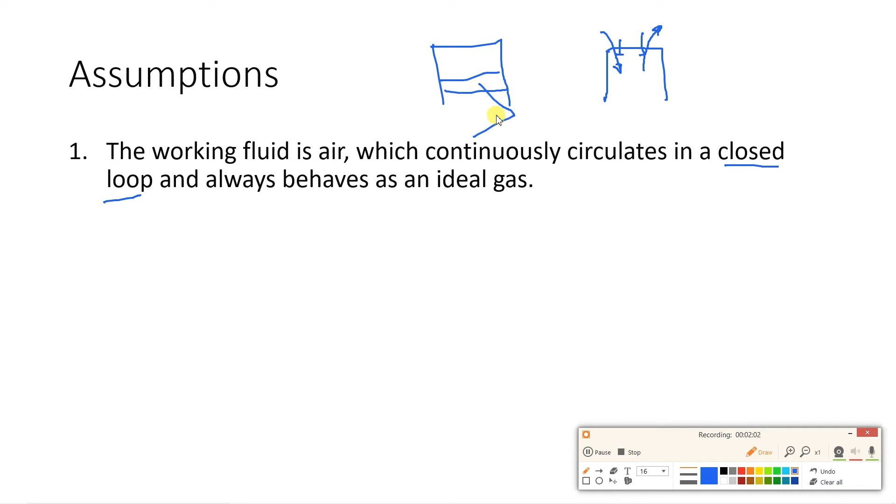So the first assumption is that the working fluid is air. The second assumption, within this, is that air circulates in a closed loop, meaning air is not entering and air is not leaving—there will be no valves, and the cylinder will be like this, with a piston. We will see the arrangement later. This is how the system will work, with the same air undergoing different processes.

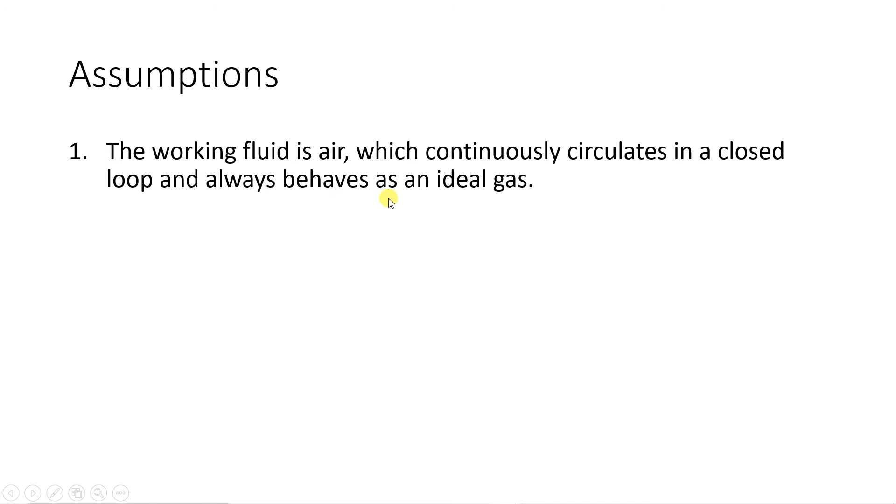We are also making one assumption here, that air behaves as an ideal gas.

Now, all the processes that make up the cycles—we will see the different cycles later—are assumed to be reversible. Again, in the actual case this is not true; all processes will be irreversible because of friction, and because of friction, the actual cycle is irreversible. Here we are assuming all processes in the cycle are reversible, which is why the cycles we are going to study are ideal cycles.

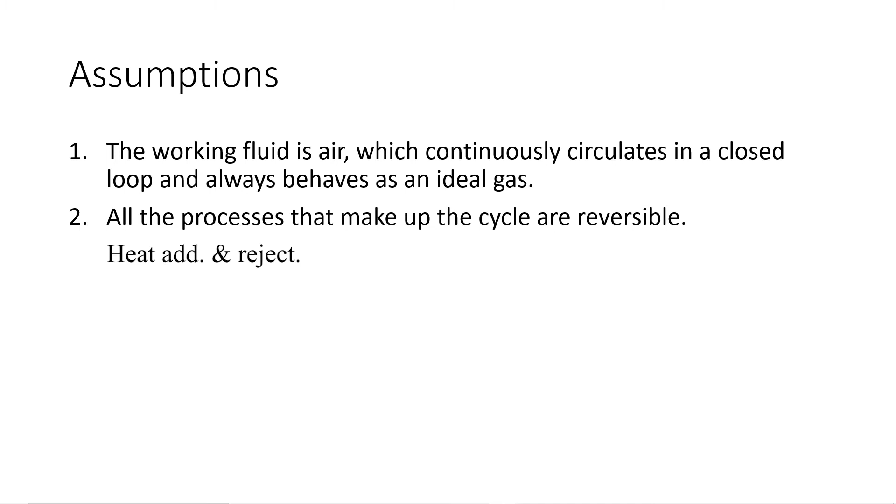Third, heat rejection and heat supply take place with the help of an external reservoir. This point is important to understand, and we will see it later. So this is heat addition and heat rejection—it takes place with the help of an external heat reservoir due to heat transfer.

Next, the specific heat of air does not vary with temperature. Again, this is an assumption. Practically, if you check any thermodynamics data book, you will see that the specific heat of air, Cp, does vary with temperature. But here, the assumption is that the specific heat of air does not vary with temperature.

The working fluid is homogeneous throughout and no chemical reaction takes place.

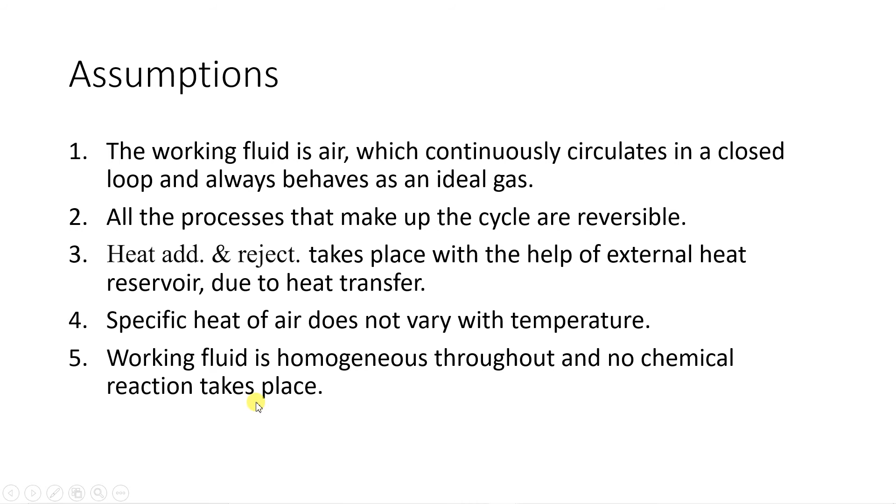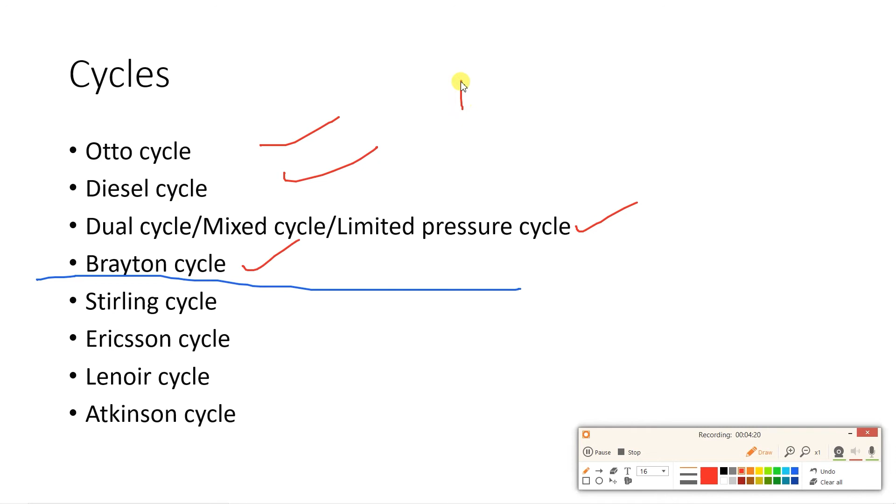Now there are different cycles involved here. We will see the first four cycles: Otto cycle, diesel cycle, dual cycle, and Brayton cycle, looking at the derivations and numericals. Whereas for the remaining four cycles, we will only look at the theory and working of the Stirling cycle, Ericsson cycle, Lenoir cycle, and Atkinson cycle.

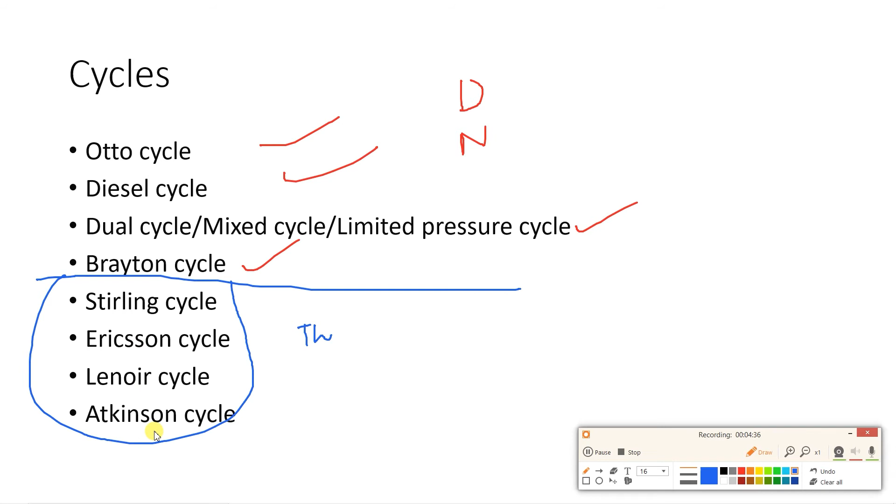So we'll move on to the first cycle, known as the Otto cycle. Now, the Otto cycle is an ideal cycle for the spark ignition engine. What do you mean by spark ignition engine? You will find a spark plug in a petrol engine. So this Otto cycle is an ideal cycle for the spark ignition engine, meaning the petrol engine. Now why is this an ideal cycle?

Because we have made some assumptions, like air is ideal, air is the only working fluid, and this is a closed system where air is not entering and leaving the control volume—so the system is a closed system. Because of these assumptions, the cycle we are going to study is an ideal cycle. This cycle was developed in 1876 by Nikolaus Otto, who was a German engineer.

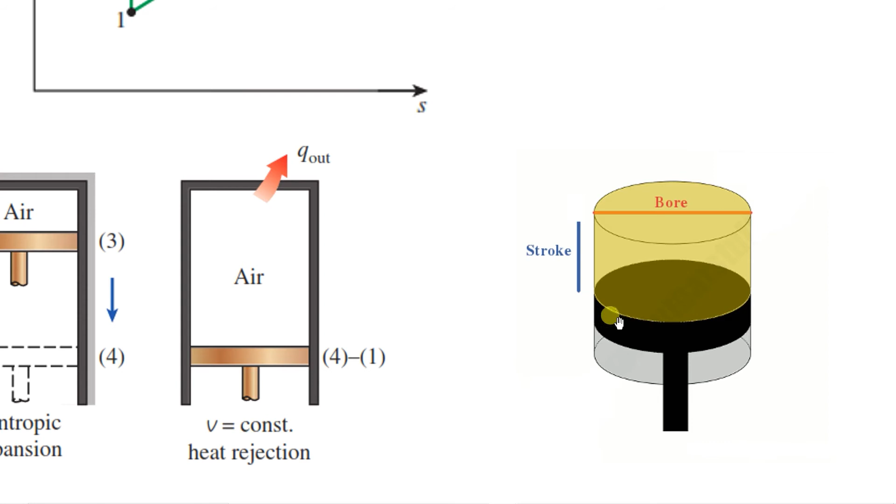To understand this cycle, we will first understand basic terminologies. Suppose this outer part is a cylinder, which is hollow and empty. The working fluid will be air only. This part is the piston. The piston is also cylindrical, but its length is small compared to the cylinder. So here a cylinder is shown, and inside the cylinder the piston is there, and this piston will reciprocate inside the cylinder.

Valves have not been shown over here. So basically this is a closed system. Same air is getting compressed, same air is getting expanded.

One assumption is that heat is added with the help of some external reservoir. Outside, Q in is entering the cylinder. There will be a reservoir attached, which is at higher temperature compared to the system, so heat is supplied to the closed system. Similarly, heat is rejected through another reservoir whose temperature is less than the air inside the cylinder. That is why heat is rejected, because of the gradient.

You have to understand that air is not entering and exiting the closed system, that is why this is a closed system. The heat transfer which occurs in the system is with the help of an external reservoir. In the actual case, there will be a valve and air is entering, there will be combustion, there will be a spark, and heat is generated inside. But since this is an ideal cycle, we study this system as a closed system, and to supply heat we use some reservoir.

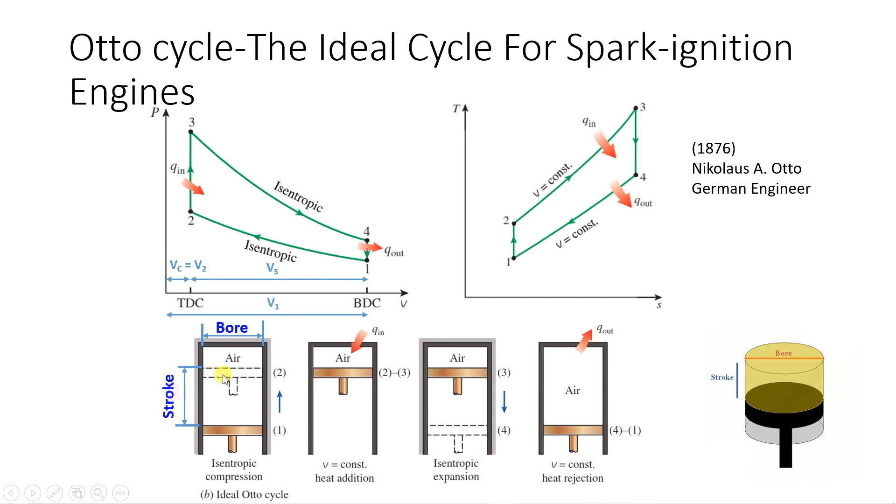Now to understand this diagram, I'll draw one more diagram. Here I have kept the cylinder in horizontal position. This is because when the piston is at the rightmost position, that is point number 1. Then the piston moves from right to left. This process is known as isentropic compression. Now it is important to compare these two diagrams.

These are the 4 cases. First, on the diagram, isentropic compression is there, process 1 to 2. Then constant volume: on the PV diagram, from 2 to 3 volume remains constant on the x-axis, so this is the constant volume heat addition process. The third process, 3 to 4, is isentropic expansion, and the fourth process is constant volume heat rejection. So this is how we get the ideal Otto cycle.

Now here the position of the cylinder is vertical. The initial position of the piston is over here and the final position is over here. This piston is not touching the uppermost part of the cylinder because air is inside. When you are compressing the air, there will be back pressure from the air, so some clearance has to be maintained. You can see this clearance given here, at the end of the cylinder where air has been compressed.

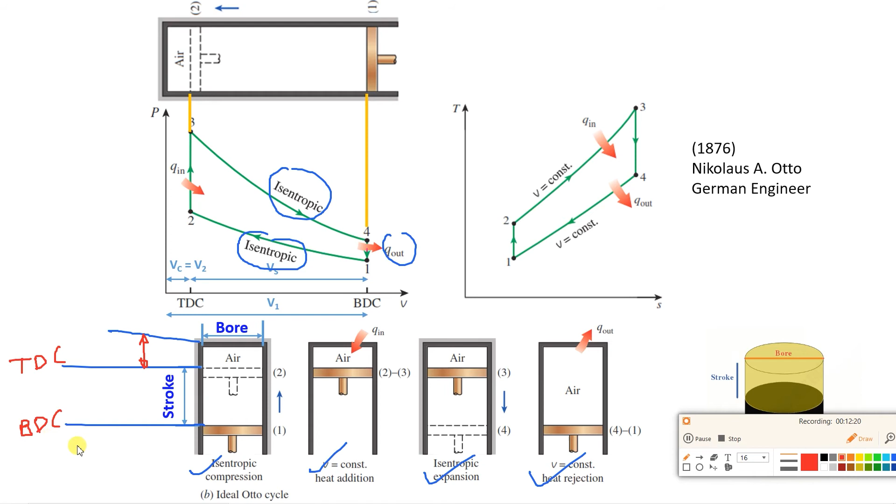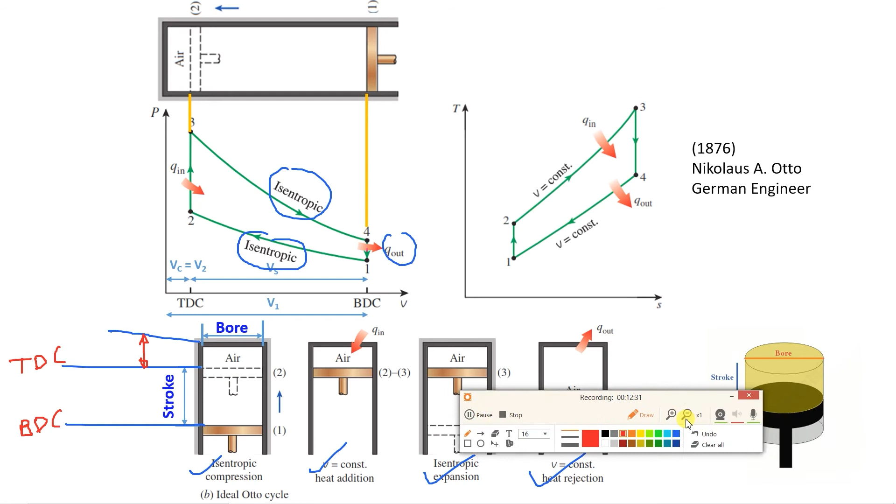So these are a few new terminologies. Bore is there - bore is the internal diameter of cylinder. Then stroke is there, which is the length the piston travels, known as stroke length. And the topmost position, where the piston stops, there will be some clearance volume. This volume will be clearance volume, and this is known as top dead center, and this one is known as bottom dead center. It will depend on the orientation also, whether the piston is over here or the cylinder is inverted. So these are the few notations.

Now what I have done over here is we'll simultaneously see both the diagrams - the top diagram and the bottom diagram. So suppose initially piston is at point number 1. Here also you can see point number 1 piston is there.

Now we apply external work. Inside the control, inside the system, what is present? Air is there - that is our assumption. And this is a closed system, so you can see there is no opening in the cylinder, so air cannot escape. So piston will compress the air, piston will reach over here, and this is point 2. So 1 to 2 is shown over here, this is isentropic compression.

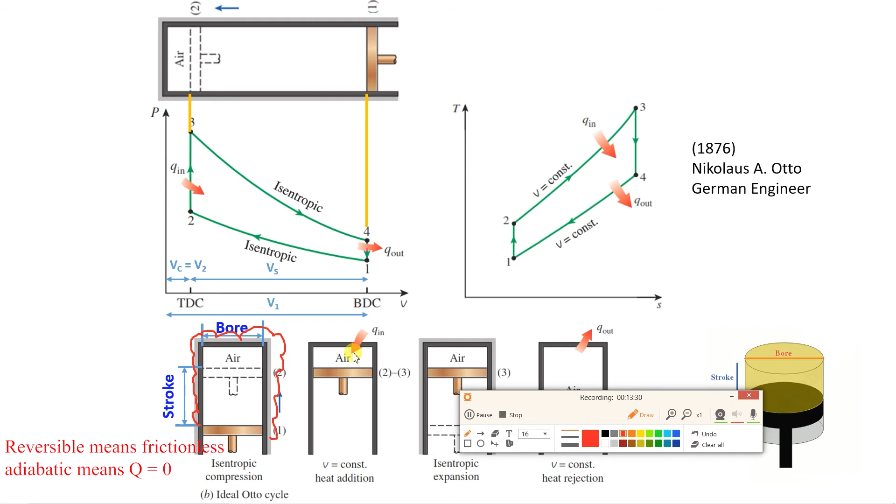Now why is this isentropic compression? You can assume that insulation has been provided during compression, so during compression heat is not rejected. So it is reversible and adiabatic - that is why isentropic.

Now once the piston has reached at this position, top position, what will happen? At constant volume, piston will remain here - you can see volume is constant. External reservoir is attached, which is at higher temperature, and it will supply heat at constant volume. So here you can see process 2 to 3, it is heat addition at constant volume.

Now it is important to note that whatever points we are marking, like isentropic compression, here volume is reducing. This part we have already seen in module number 1, so this module is closely linked with module number 1. All the closed system formulas we studied in the first module, for all the processes - isentropic, constant volume, constant pressure, isothermal, polytropic - all the formulas will be required over here. So we will be using those formulas over here as well.

And I had already explained how to draw PV and TS diagram. So constant volume heat addition process, why it is vertical, I have already explained. So you can check that. If you have any doubts, you can check that video.

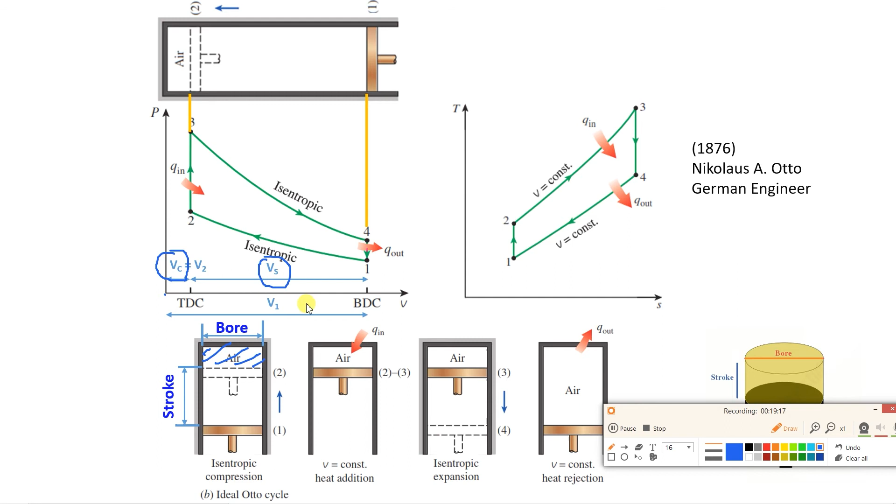This volume, I am showing in a 2D diagram, but it will be a volume since it is a cylinder. So this is known as clearance volume, and wherever the piston is moving in the stroke, that volume is known as swept volume, VS, denoted by VS. So these are few terminologies which you should remember.

Now from here we can derive a simple formula for VS, swept volume. What will be VS? From point 1 to point 2, what is the volume of the cylinder? It will be pi by 4 d square into L. What is this d? It will be bore. And what is this L? It will be this stroke.

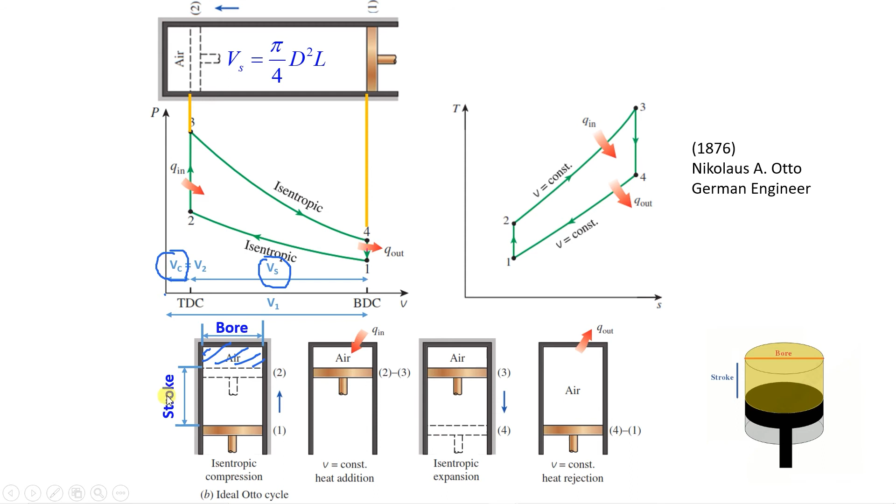So what is the formula? This swept volume will be from this point to this point. So this volume is swept volume, which is given by VS is equal to pi by 4 d square, d is bore, into L, L is stroke. So this is known as Vs, swept volume.

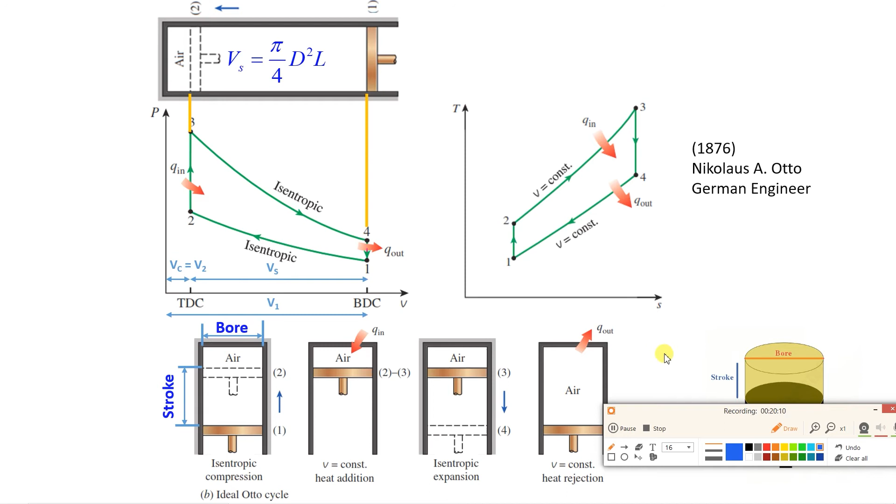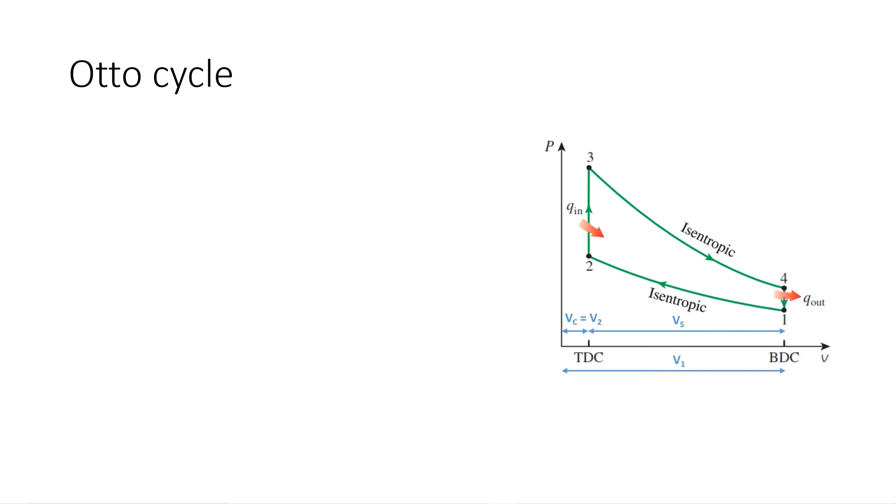Now again we will define few terminologies in case of Otto cycles. Before going for the derivation of the efficiency of Otto cycle, it is important to understand some terminologies. So first terminology is compression ratio. We are denoting compression ratio by RC.

Again here it is important to note that if you refer different textbooks, you will find different notations. So we are using compression ratio as RC. It is not necessary that all textbooks are referring compression ratio as RC. Meaning will remain same, notations might vary. So what do you mean by compression ratio? It is the ratio of volume before compression to the volume after compression. Now what is the volume before compression?

Here you can see the diagram. What is the volume before compression? It will be this one, right? This is volume before compression. And what is the volume after compression? After isentropic compression, piston will reach at point number 2. So this will be volume after compression. So we have to understand this. What will be the formula of compression ratio? It will be point number 1 volume V1 divided by point number 2 volume V2.

Now next definition. Again here you can see that V1 is made up of Vc plus Vs. So you can replace this over here. So Vc is clearance volume, or V2 also you can say. So this V1 will be equal to Vc plus Vs, swept volume. So this is the total volume, Vc plus Vs, divided by what is V2? Only Vc. So this formula also you can use. So this V2 is Vc. Now next formula, next definition we will see.

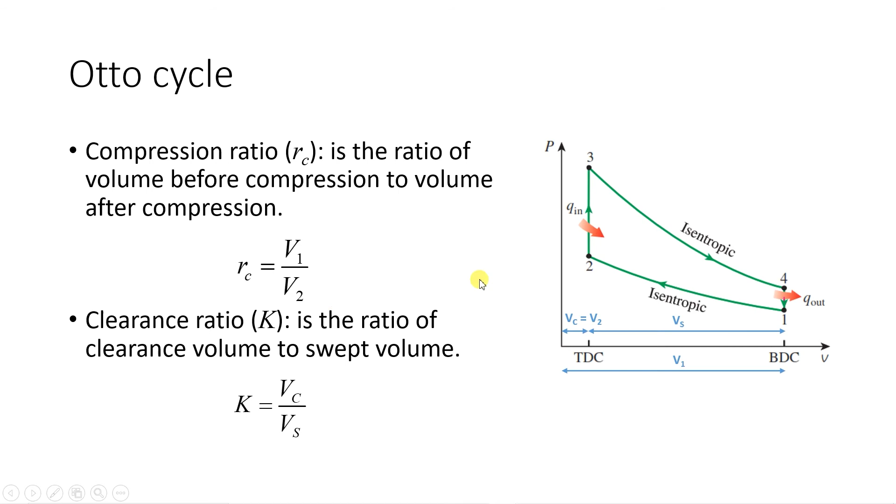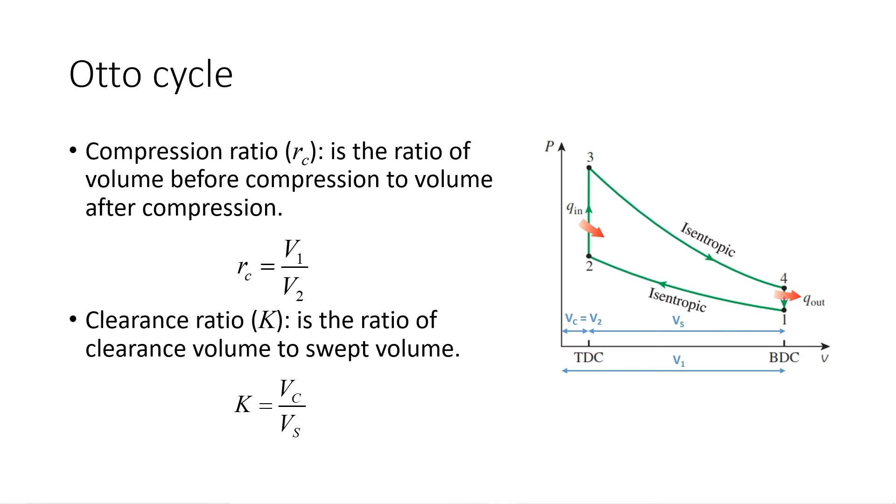In Diesel cycle you will understand, even though there also we are defining compression ratio, the definition remains same, but points are changing, that is why the formula might change. In few cases the formula might change, in few cases it might not change. We'll see when we go to the other cycles.

So this is how we get the relation between K and Rc. Now next definition is expansion ratio. What do you mean by expansion ratio? It is the ratio of volume after expansion.

So here you can see 3 to 4 is isentropic expansion. So what is volume after expansion? V4, to the volume before expansion, which is V3. So you can write Re is equal to V4 by V3.

Now in case of Otto cycle only, it is visible in the diagram that V4 is equal to V1 and V3 is equal to V2. So we can write one more formula. V4 is equal to V1 because this is constant volume heat rejection, and V3 is equal to V2 because this is constant volume heat addition.

So again here for Otto cycle, it is important to note that expansion ratio is equal to compression ratio. Now V1 upon V2 we have already defined, it is compression ratio. So this is a special case. Only in Otto cycle you will find that expansion ratio is equal to compression ratio, because here we have constant volume process.

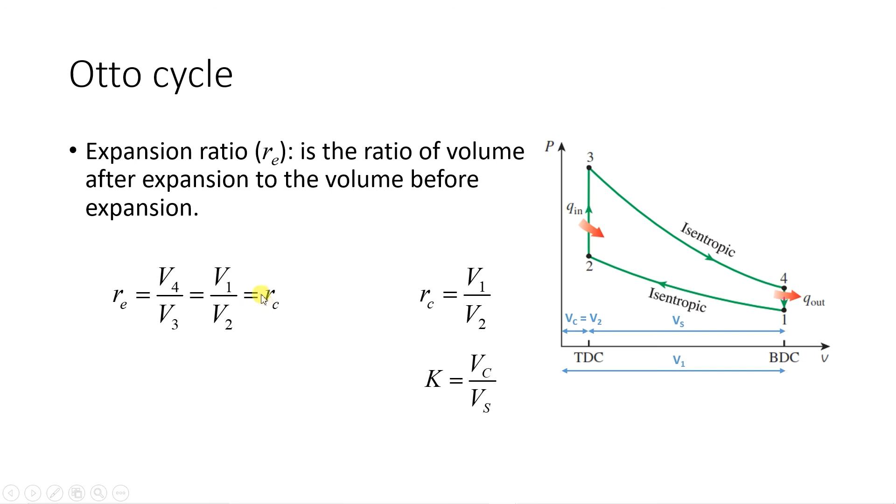So these formulas we have studied: Re is equal to V4 by V3, Rc is equal to V1 by V2, and Re is equal to Rc for Otto cycle, and K is equal to Vc by Vs.

Now we will look at the efficiency derivation of Otto cycle thermal efficiency. Very important derivation. So again I have shown over here the PV and TS diagram. Basically using this diagram we can derive efficiency of Otto cycle.

Now what do you mean by efficiency? We have seen this in second law of thermodynamics. It is W net upon heat supplied. Now since this is a cycle, here you can see 1, 2, 3, 4 and 1. Since initial point and final point is same, we can say that this is a cycle, and it is Otto cycle.

So for a cycle, what is first law of thermodynamics? W net is equal to Q net. So efficiency is W net upon heat supplied, output upon input, and we can replace W net by Q net based on first law of thermodynamics.

Now what is this Q net? You have to add whatever heat is supplied, minus whatever heat is rejected. So here you can see heat is supplied during 2 to 3, QS, and heat is rejected in 4 to 1 process, minus QR, divided by QS. Simplifying this, you will get 1 minus QR by QS.

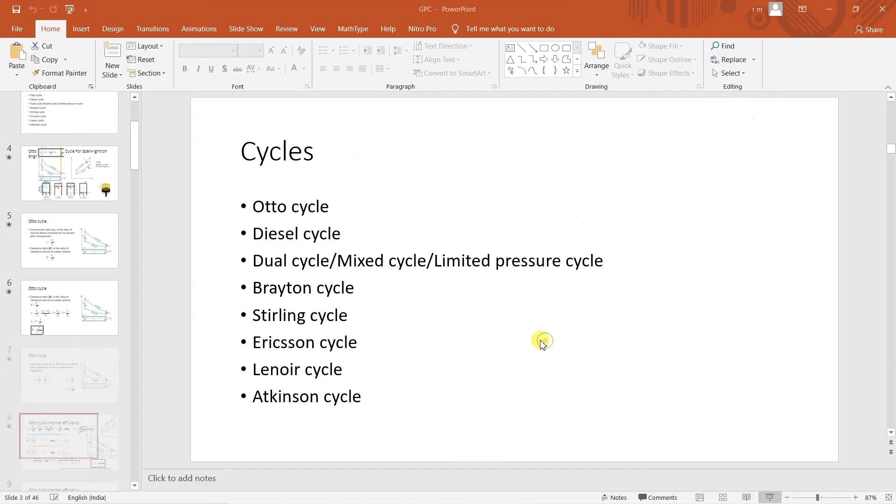So which formulas now you have to use for heat rejection and heat addition, module number 1? So here we will go to the formula list. For closed system, constant volume process, what is the heat formula? It is mCV times T2 minus T1. So we will be using this formula for QS and QR. So we'll again go back to the derivation.

So here what I have done, I am substituting the formula. It is mCv delta T. So instead of QR, here you have to take note that when we are deriving this efficiency, at the initial stage itself I am declaring that the Q value is negative. So already the sign convention has been taken into account. So don't go into the details of the formula, like if you see the formula list.

Okay, let me hide this. What is the actual formula here? Actual formula is Q1 to 2, direction is from 1 to 2. Formula is mCv T2 minus T1. So it has a certain particular direction. So if you see this one, when 1 to 2 is there, the formula will match.

But when you are going for 4 to 1, using that formula, you will get a negative answer. Why? Because it is heat rejected. But it is important to note that we are already taking care of sign convention. How are we taking care of sign convention? At this stage itself, I am declaring that heat is negative.

Here you can see I am taking this Q value as negative. So that is why when I am writing the formula for heat rejection, I am not looking at sign convention.

So here you can see that I am not considering sign convention. I am simply writing the magnitude. Why? Because the direction, the sign, I have already taken into account. So magnitude means I will write this as you can see over here. I have written higher temperature minus lower temperature.

Okay, so what is now the formula for constant volume heat interaction? It is mCv dt, delta T. So in both numerator and denominator, I have written mCv dt.

Now since I am already considering the sign convention of heat rejected, the formula of heat rejection which I am writing, it is rejected. Here you can see, I will highlight this in the diagram also. From 4 to 1, here heat is rejected, and we have already considered this sign over here. So that is why we are only looking at higher temperature which is T4 minus lower temperature which is T1.

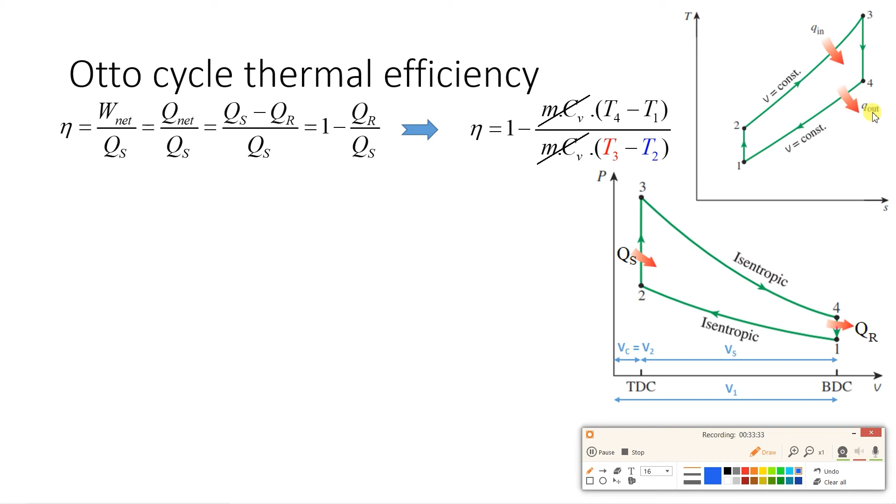So in this way, at the initial stage itself, I am taking care of sign convention, so that when I am writing the formula, I can directly see the TS diagram, and whatever is the higher temperature and lower temperature, I can write down that value.

Now, process 1 to 2. So we will go process by process now. So 1 to 2 is which process? It is isentropic compression. So for isentropic compression process 1 to 2, what we can write?

There is a relation between temperature and volume. What is that relation? You can again go back to the formula list. What is the relation? See this one. For isentropic process, let me highlight the isentropic process. This is the isentropic process.

So for isentropic process, what is the relation? Okay, here you can see the relation between temperature and volume. So respective relations can be used. We will be using all these 4 relations throughout, wherever isentropic process is there. So again we'll go back to the derivation.

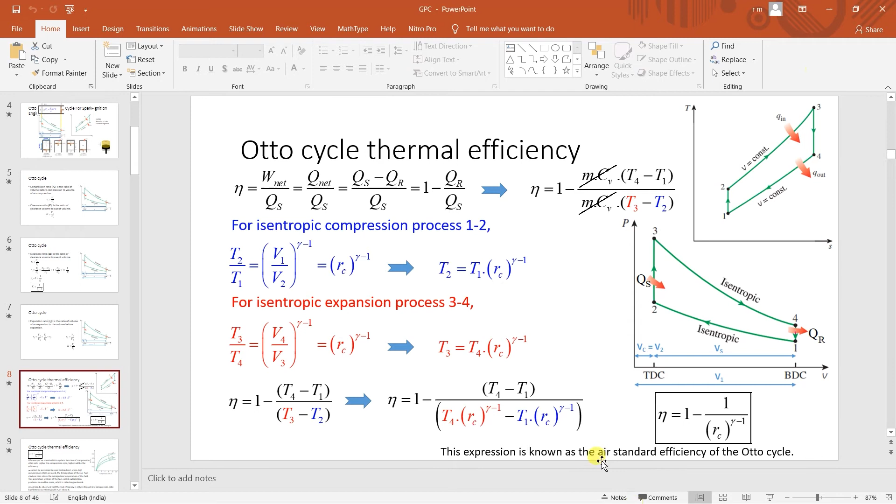So from there I have written T2 by T1 equal to V1 by V2 raised to gamma minus 1. We have derived this. What is V1 upon V2? It is the compression ratio RC. So I have to substitute that value, RC raised to gamma minus 1. So T2 will be equal to T1 times RC raised to gamma minus 1, where RC is V1 by V2, the compression ratio we have already discussed.

Now we will see process 3 to 4, which is isentropic expansion. So again we can write down the formula, T3 by T4. Here you should note, don't make the mistake: when T3 by T4 is there, volume is in reverse way, V4 by V3 raised to gamma minus 1. This formula we have already derived also in module number 1.

Now what is this V4 by V3? It is known as the expansion ratio RE. But for the Otto cycle, we have seen that RE is equal to RC. So I am replacing V4 by V3 with RC, giving RC raised to gamma minus 1. So what I will get is T3 equal to, taking T4 to the right hand side, T4 multiplied by RC raised to gamma minus 1.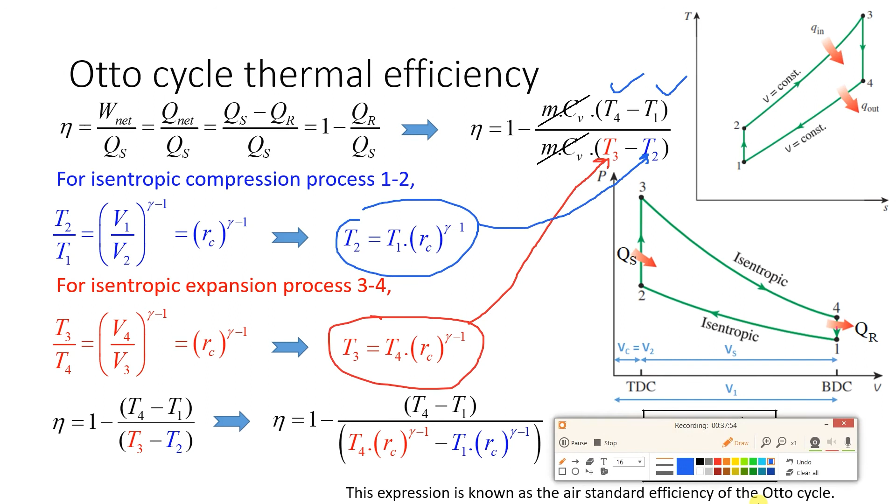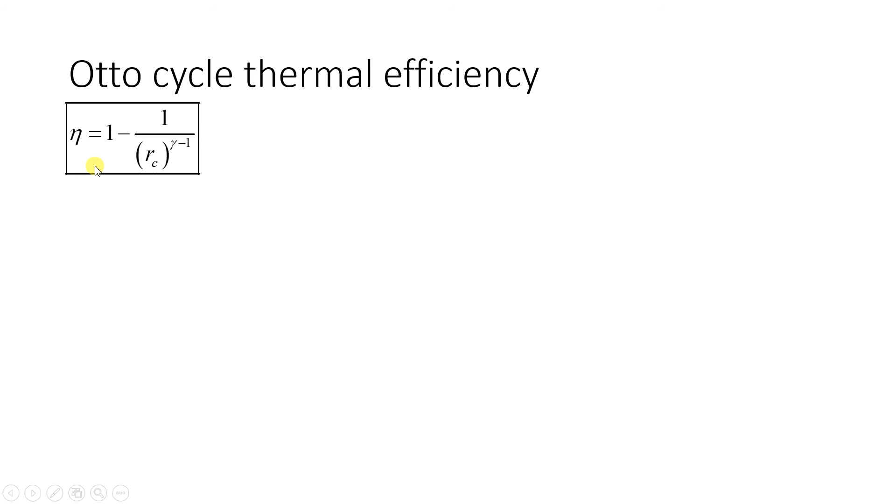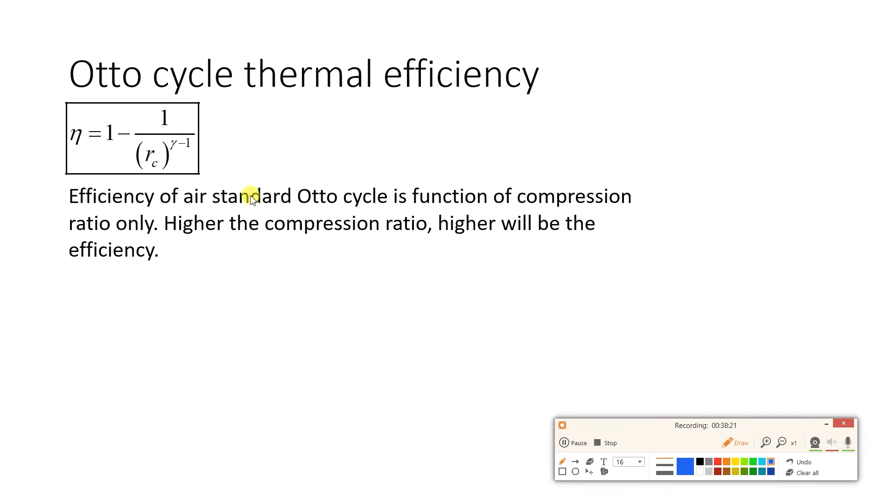Now after deriving this, we will see on which parameters efficiency depends. The efficiency of air standard Otto cycle is a function of compression ratio only, RC. Higher the value of compression ratio, higher will be the efficiency. Here you should understand: if this RC value is increased, we are increasing the denominator. So if the denominator is increased, this ratio, the total ratio, will decrease, and 1 minus a small value will give higher efficiency. That is why higher compression ratio gives higher efficiency.

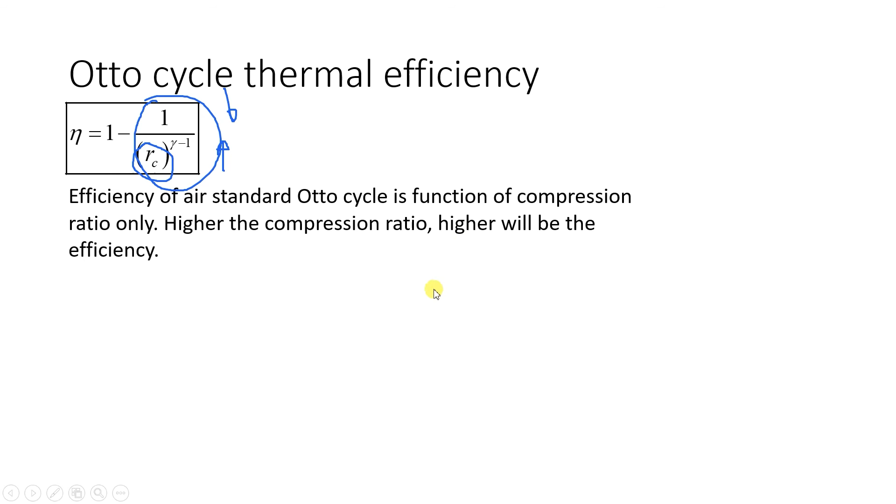This is an interesting phenomena. When compression ratio is increased beyond a certain limit, the temperature of the air-fuel mixture rises above the auto ignition temperature of the fuel, meaning the fuel will auto ignite at that temperature. Because of that, there will be premature ignition of fuel, also known as auto ignition, and that is undesirable. This produces an audible noise inside the engine, and that phenomena, that noise, is called engine knock. So because of that, we cannot go beyond a certain limit of compression ratio.

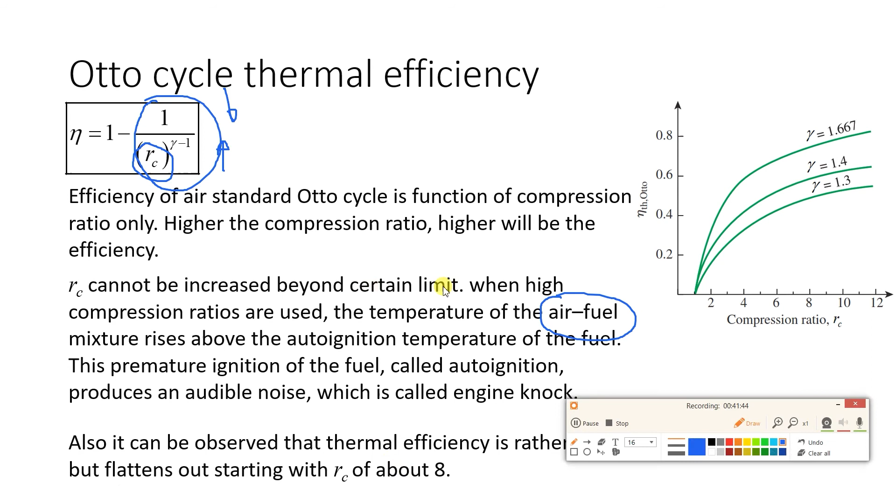Now we'll see a derivation of work output from the Otto cycle. So where do you get work output? I'll show you this in the diagram. During process 1 to 2, which is isentropic compression, we supply work to the system. During process 3 to 4, isentropic expansion, we get work from the system. So this work will be negative and this work will be positive.

Now you have to go back to the formula list for isentropic process. What is the formula of work done for isentropic process? It is P1V1 minus P2V2 upon gamma minus 1. So this formula we will be using.

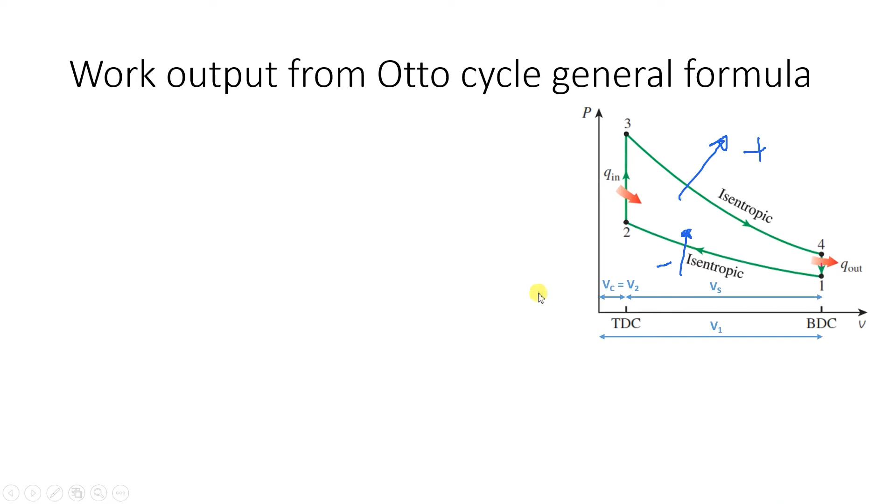So here you can see I am using that formula. For process 3 to 4, the formula is P3V3 minus P4V4 upon gamma minus 1. Now this work is consumed during compression, so it is negative: minus P2V2 minus P1V1 upon gamma minus 1.

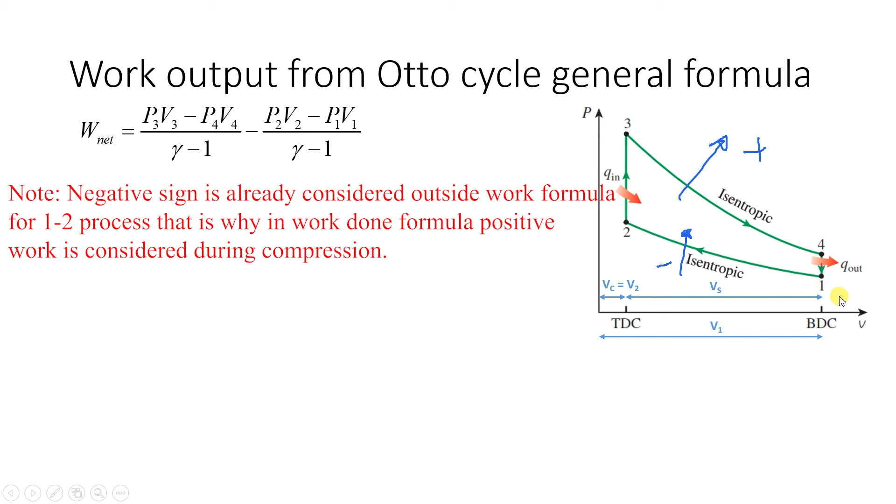Now what I can do is take 1 upon gamma minus 1 common. So I am taking 1 upon gamma minus 1 common outside, and in this part I am taking P4V4 common.

So here you will get P3V3 divided by P4V4 minus 1, minus, and in this part I am taking P1V1 outside as common. So here you will get P2V2 divided by P1V1 minus 1.

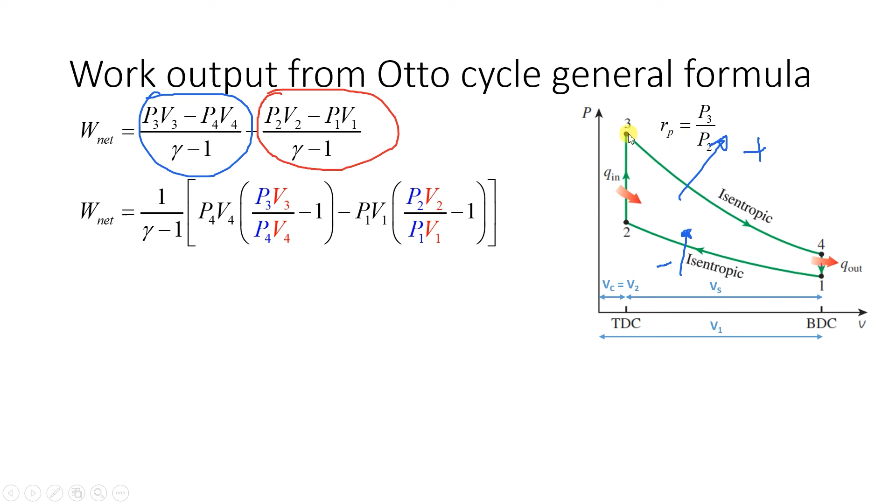Now I have highlighted P3, P4, V3, V4 with some colors, because we will be replacing these values with some other value. Now one more definition: pressure ratio, RP. The definition we will see afterwards in the diesel cycle later on, but just understand the formula here. For the Otto cycle, the pressure ratio is P3 by P2.

Now we will do some small analysis. Process 3 to 4 is an isentropic process. Refer to the closed system formula list for the relation between pressure and volume. So I'm writing that relation: P3 by P4 is equal to V4 by V3 raised to gamma.

Similarly, for process 1 to 2, isentropic compression, I can write the relation between pressure and volume: P2 by P1 equal to V1 by V2 raised to gamma. Now, V1 is equal to V4 and V2 is equal to V3, this is for the Otto cycle. So I can write P3 by P4 equals P2 by P1 equals V4 by V3 raised to gamma equals V1 by V2 raised to gamma. Now V1 by V2 is the compression ratio RC, and V4 by V3 is the expansion ratio RE. For the Otto cycle both are the same, so I am writing it as RC raised to gamma.

Now you can understand that since this is in blue color, we will be substituting P3 by P4 here. You can substitute that value, and this P2 by P1 value also you can substitute over here. Now similarly we will see the definition of compression ratio. It is V1 by V2, and it is also equal to expansion ratio, which is V4 by V3. So you can see it given by red color, and here you can find it is the inverse of this one. Here we have V4 by V3 and here we have V3 by V4. So this value we can substitute over here, and similarly this red value we can substitute over here.

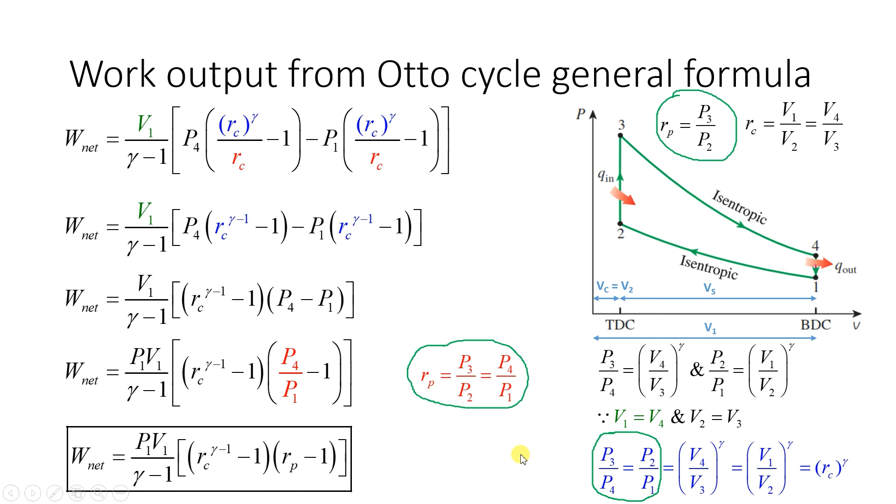Now next important definition we will see: mean effective pressure, denoted by MEP. Now in numericals also you have to calculate the value of mean effective pressure, so understand the concept of this mean effective pressure.

What is done? It is a fictitious pressure that if it acted on the piston during the entire power stroke would produce the same amount of net work as produced during the actual cycle.

Here you can see 1 to 2 is isentropic compression, then 2 to 3 is constant volume heat addition for Otto cycle, 3 to 4 is isentropic expansion, and 4 to 1 is constant volume heat rejection. So if you constitute this cycle, what is the W net? It will be power produced during 3 to 4 minus power consumed during compression from 1 to 2.

That is W net. So this you can replace by a horizontal pressure, such that it is a fictitious pressure that if acted on the piston during the entire power stroke would produce the same amount of net work. So if you consider area under the PV diagram, what is it? Net work. So what will be this one? Area, it will be this area of rectangle.

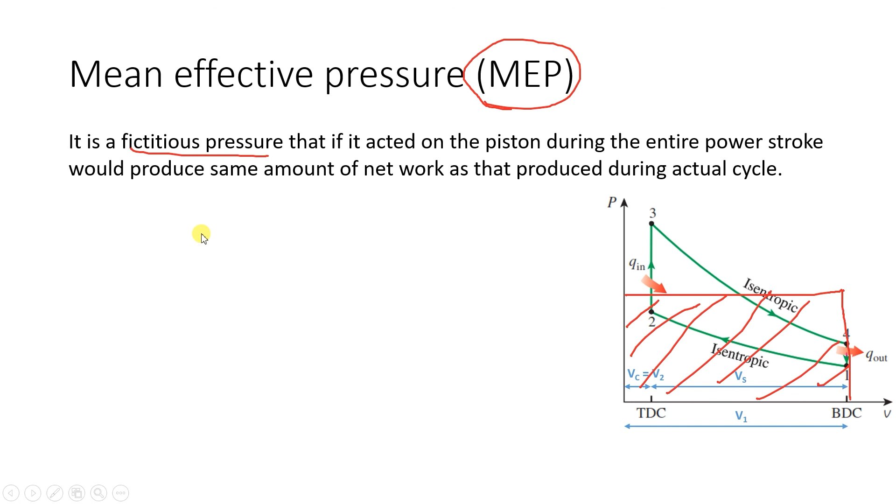Now net work output formula we had just derived, this formula W net in the previous slide, so that value we have to substitute. We'll see that now.

Now what is the swept volume? See this diagram, swept volume, it is this one, Vs, which is from V1 to V2. So what you can write? V1 minus V2 is equal to Vs. So this swept volume means what? It is Vs, so this is equal to V1 minus V2.

So we can take V2 common, so you will get V2 in bracket V1 by V2 minus 1. And what is V1 by V2? Compression ratio RC, so it's equal to V2 in bracket RC minus 1.

Now substitute this value in this equation. So mean effective pressure is, this one is the W net value which we derived in the previous slide, and this value is the swept volume.

So here you can see, if you consider this one, I'll just give you for some understanding, I'll discuss this formula, how we get this formula. So what is area under PV diagram work, na? So this W net is equal to, if you take this swept volume on the left hand side, what you will get? So it will become mean effective pressure.

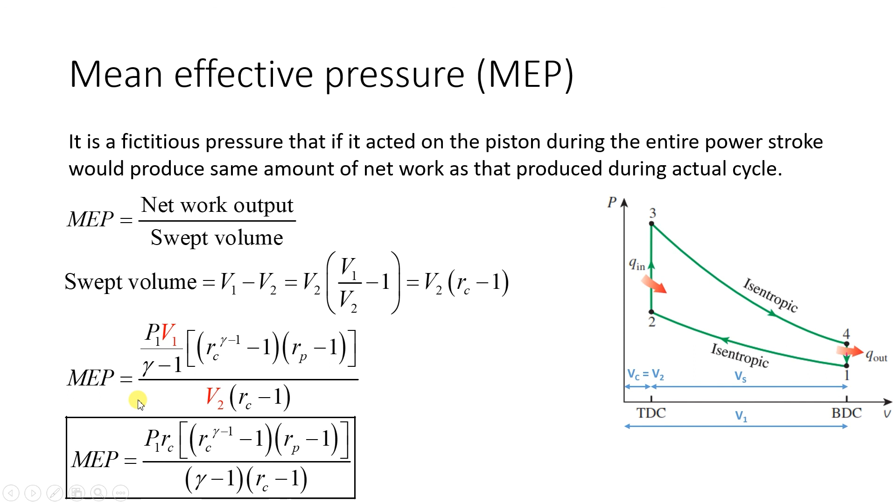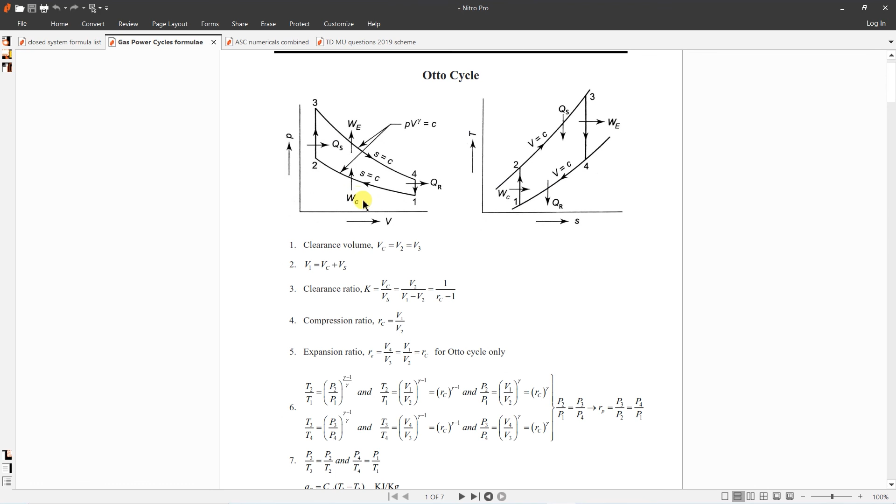Now after this I'll show you the formula list. So this formula list will be given to you, understand the formula list.

Here I have written Otto cycle PV diagram has been shown, and all the definitions here you can see: clearance volume will be Vc, which is equal to V2 equal to V3. What is V1? V1 will be Vc plus Vs. Then clearance ratio, compression ratio, expansion ratio. I have written over here expansion ratio is equal to compression ratio for Otto cycle only.

Then, considering process 1 to 2 which is isentropic, and process 3 to 4 which is again isentropic, I have written all the relationships: temperature-pressure relationship, temperature-volume relationship with respect to compression ratio, then pressure-volume relationship. From here we get some other parts like P2 by P1 is equal to RC raised to gamma, and P3 by P4 is also equal to RC raised to gamma.

So we can find that P2 by P1 equals P3 by P4, as we have seen in the derivation, and RP, pressure ratio, is equal to P3 by P2 equal to P4 by P1. This already we have seen in the derivation.

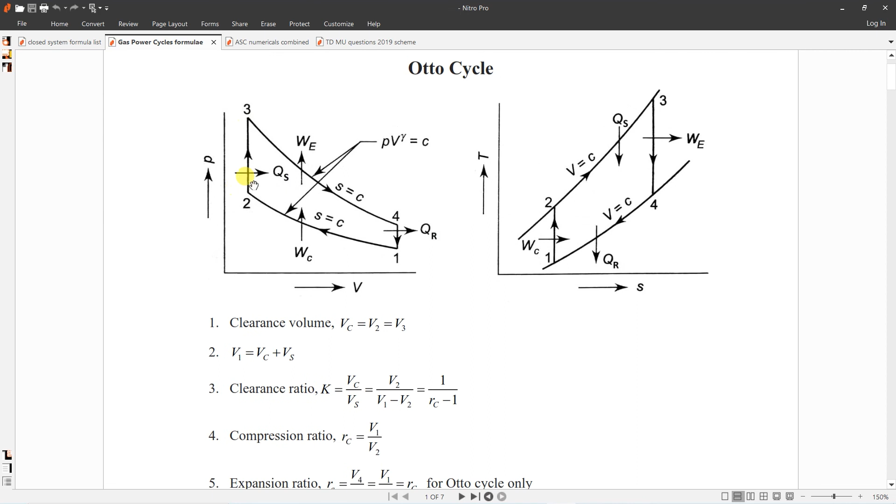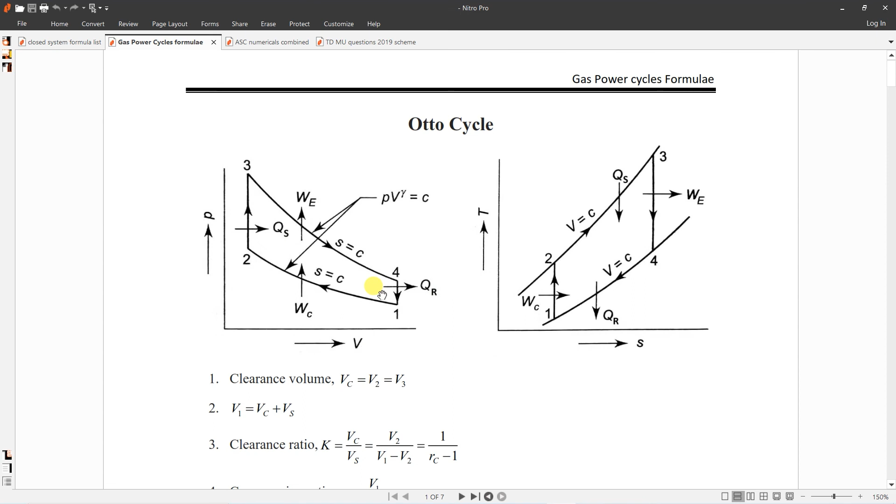Now consider process 2 to 3. Which process is this? Constant volume process. So when volume is constant, what is the relation between pressure and temperature? These are the two relations: P3 by T3 equal to P2 by T2, and P4 by T4 equal to P1 by T1, for 4 to 1 and 2 to 3.

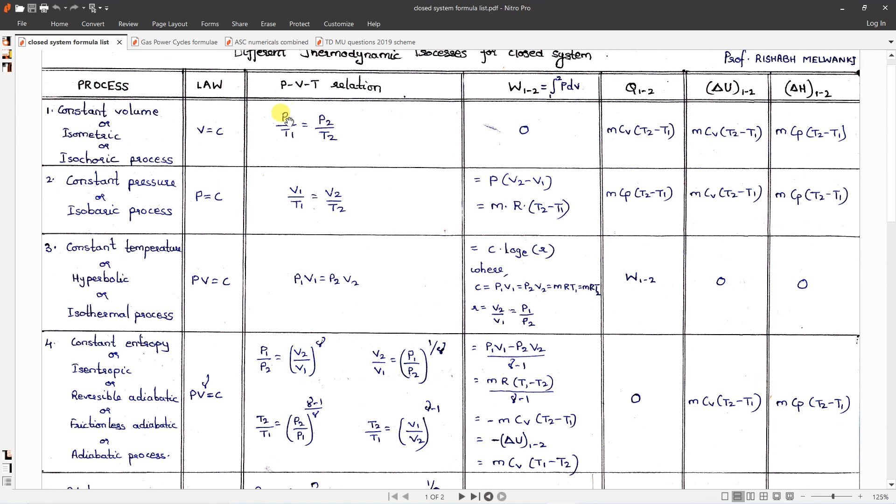So this you can find in the formula list. Let me show you the formula list. For constant volume, what is the relation between pressure and temperature? It is P by T is constant, since volume is constant, so you get P1 by T1 equal to P2 by T2. Using that, here you can see P2 by T2 equal to P3 by T3. So the same thing I have written here.

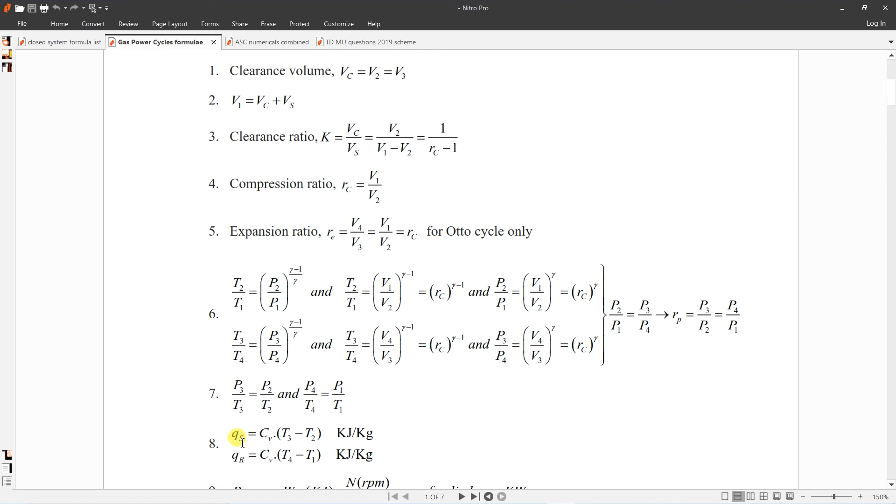And similarly, when I write small q, this is per kg mass, so I am not writing m. Since heat is added and rejected at constant volume during process 2 to 3 and 4 to 1, this formula we had seen in derivation becomes Cv(T3 minus T2), and this formula becomes Cv(T4 minus T1).

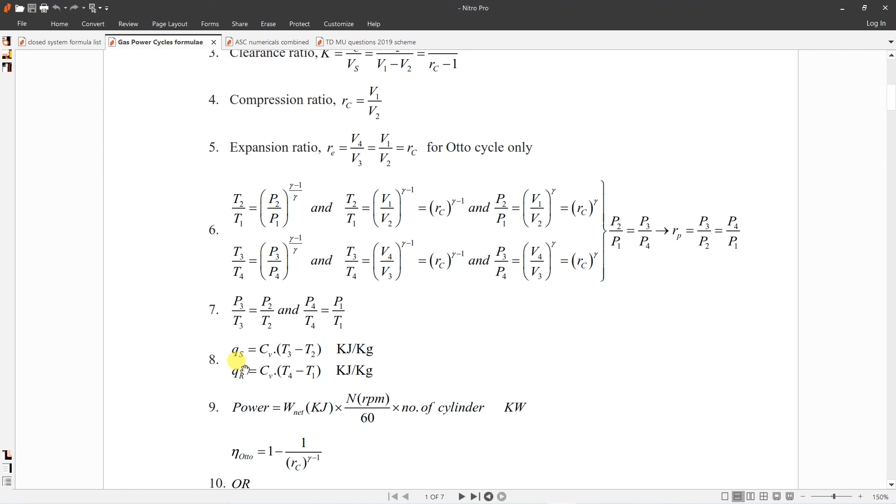Now you should note that in this formula, T4 minus T1, the sign convention is not taken care of. So when you are using this Q rejected, you have to use a negative sign separately. This formula we will understand when we are solving the numericals.

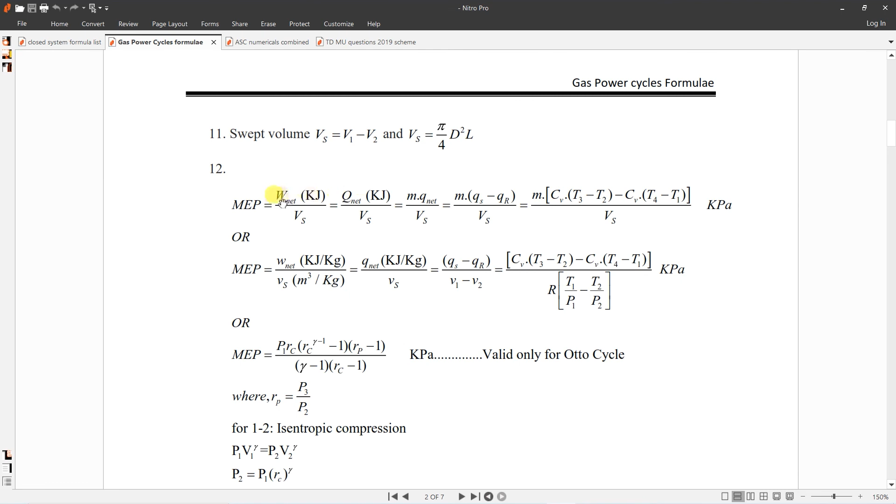So we will go to this. All the formulas are given. The mean effective pressure formula is given over here, and some more mean effective pressure formulas are given over here. I will be providing you this PDF file of the formula list, and you can go through how we arrive at these formulas.

Now we'll see a small numerical. This is independent of our topic, not related to air standard cycles or gas power cycles. It is related to pressures. A very interesting question is here, so please pay attention. Very easy question, but very tricky question, and we will learn about a new concept here.

So just understand the data: volume and temperature of air. Air is assumed to be an ideal gas in a closed vessel, so this is a closed system. Volume is 2.87 meter cube and temperature is 300 Kelvin respectively. Gauge pressure — here a new terminology has been used, which we have not seen — gauge pressure indicated by a manometer fitted on the wall of a vessel is 0.5 bar. Gas constant R value for air: note that earlier we considered R as 0.287 kilojoule per kg Kelvin.

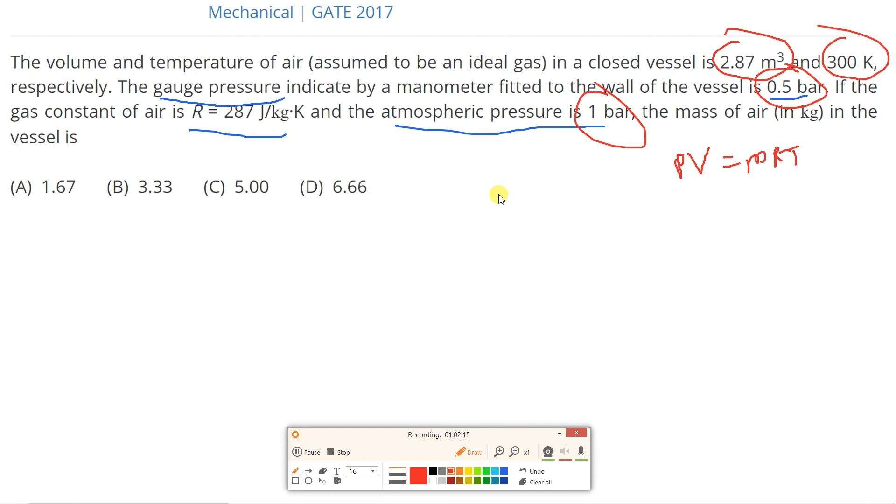So what equation will we use? PV equal to MRT, PV equal to MR into T. But the problem is which pressure to take, since we have two pressure values: one is gauge pressure and the second is atmospheric pressure. So how to solve this? Here you will understand a new concept — we'll see this diagram which indicates different types of pressure.

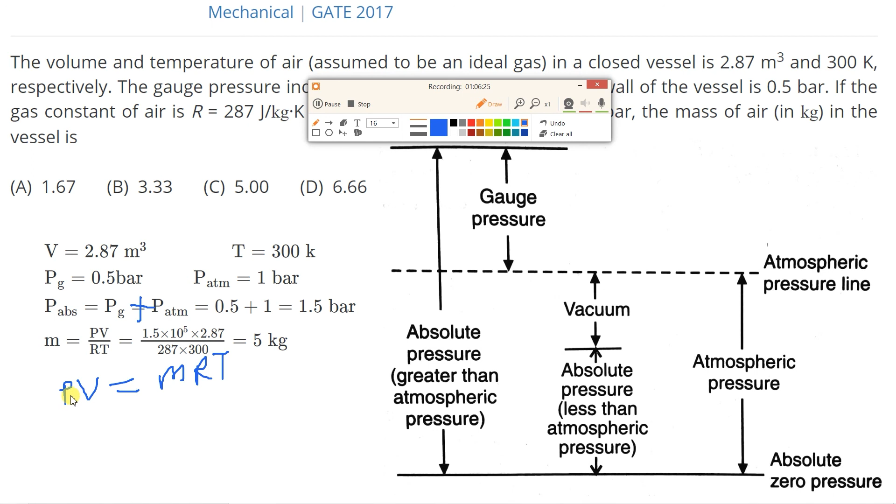Now, PV equal to MRT. In this equation, what is the P value? It is 1.5 bar, which you can convert into kilopascal, so 1.5 into 100, multiplied by volume, which is 2.87, equal to M value we have to calculate, multiplied by R. What is R given? R is given as 287.

We use R value in kilojoule per kg, so it will become 0.287, multiplied by temperature, which is 300 Kelvin. So using this equation, you will get the value of M, and M comes out to be 5 kg.

So the answer will be C. Now, one more thing I would like you to observe, this is an important concept. When we use PV equal to MRT with pressure in kilopascal, we have to use R value in kilojoule per kg. But instead of this, we can follow another system also.

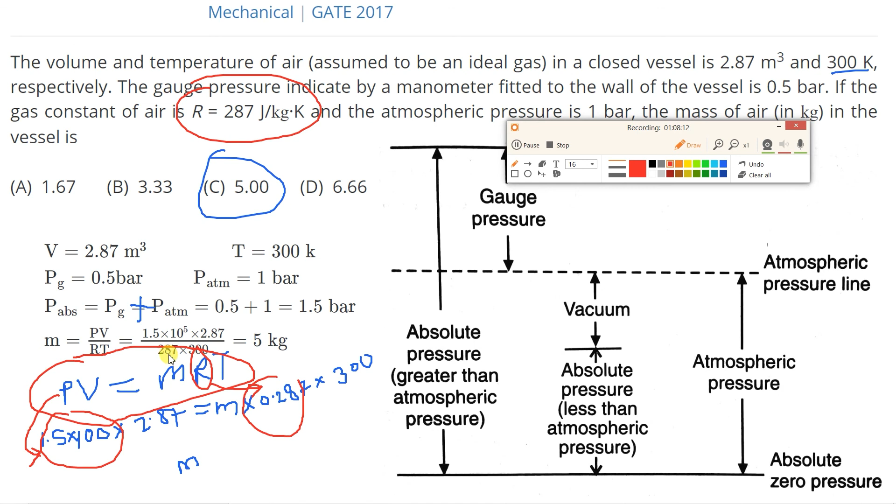Instead of substituting in bar, we can substitute in Pascal also. So here pressure value has been substituted in Pascal. How to convert bar into Pascal? It will be 10 raised to 5. So 1.5 into 10 raised to 5 Pascal, multiplied by volume 2.87, divided by M. Here, when pressure is in kilopascal we take R value in kilojoule per kg Kelvin, but when pressure is in Pascal, we have to take R value in joule per kg Kelvin. That is why here it is divided by 287, multiplied by temperature.

So both methods are valid. Either you can keep pressure in Pascal, in which case R value should be substituted in joule per kg Kelvin, or, as we normally solve numericals in thermodynamics, take pressure in kilopascal, volume in meter cube, R in kilojoule per kg, and T as temperature.